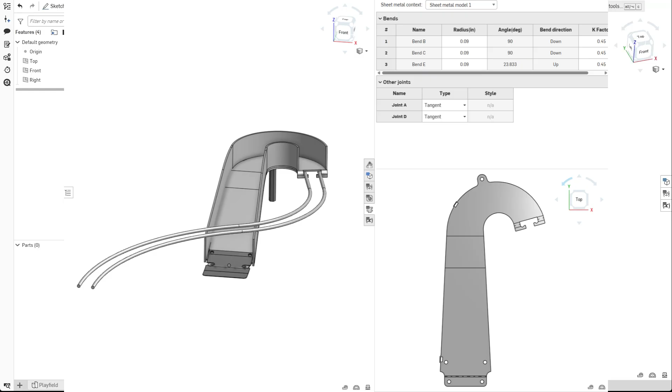There's probably a few ways to do this, but the biggest challenge when using a sheet metal model, which is this tool here, is that you can't use the standard extrusion operations except remove. So some of this process is going to be designed to kind of get around that limitation and to show you how to end up with something that's flexible and useful, but still remains a sheet metal model.

So the approach that I like to go about doing this is to create two sketches. One is going to be our outline. So if we were looking top down at the ramp, that's what we would see. And the other is the profile, which is if we were looking at the side. So the profile will describe our incline, our slope, and then the outline will describe our shape. So let's go ahead and start that. I'm just going to create a new sketch here on the top plane.

And if you were laying this out for an entire game, like you had modeled your entire playfield, one of the things you'd want to do is sample off the flippers and make sure that your entry angle looks good. However, I'm just going to show you modeling this, so I'm going to skip that part. But typically I would start with the entrance, and so I'll just do a midpoint line here. That's way too big. Let's give our entrance a size of 2.1 inches.

Okay, now from that, we can then draw some lines that come off of it, and I'm going to give it a slight taper here. Yep, okay, looking good. All right, so this is pretty standard fare so far, and for this ramp, a very common arrangement is that the ramp curves around, kind of does a 180 either to the left or the right. So let's go ahead and model going around the 180.

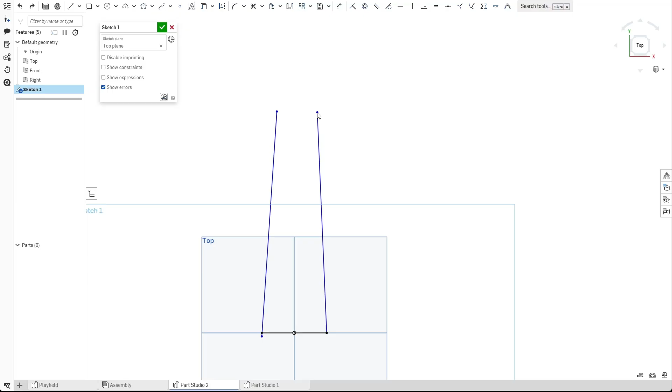Now there's a few ways to do this, and early on when I was using Onshape, I used this spline tool a lot. With spline, you kind of click out these points. The challenge with spline is that it's sometimes hard to control, but even more so, the big thing to know is that Onshape does not recognize it as a cylindrical surface. And why that is important is later on, if you want to add bendable tabs to your model, you will probably end up using a tool called wrap, and wrap requires that you have a cylindrical face.

So the solution is pretty much to stop using spline and instead use this one here called 3-point arc. The way that 3-point arc works, I'll do a demo off here to the side and then we'll do the real thing, is you have to place 3 points. The first point is the start of your arc. The second point is the end of your arc, and I'm clicking each time I do this. And then the third point is defining the radius or flex of the arc. Now, as I get close over here, it wants to snap. You see how that wants to snap there? So we can use that to our advantage.

So I'm going to select 3-point arc, and I'm going to make this ramp curve to the right. So I'm going to start on the right wall. That means I'm gonna connect with this, bring it over here, and just eyeball, let's say we go about there. Now that snapping behavior, when you connect to an existing line, will give you a coincident constraint. So there you can see it's telling me there's gonna be a perfect transition from my sidewall into this turnaround. So I'll go ahead and accept that.

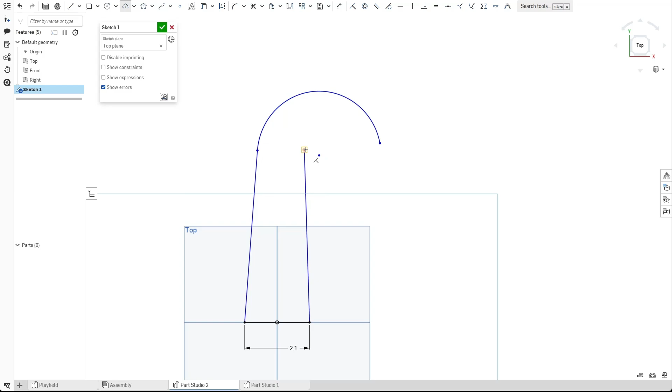And then let me do one more, same thing. I'm just going to click over here, look for the constraint, and then we're good. Okay, so I want to add a few more constraints. Let's go ahead and finish this. Let's give that a fixed size. So that was a good guess.

I was going to make it 1.4, and I got pretty close. So that's nice. And then over here, let's just constrain that to 1.5 to make sure that this is very comfortable for the ball to pass through.

At this point, depending on what we were trying to achieve, this might actually be sufficient. In your use case, you may want to dimension some of the angles here. For example, maybe you want that exactly at 87 so that it's a little straighter.

The other thing to be concerned about is this exit there. So depending on how you have this set up, maybe you want to dimension the angle coming off of that. For example, maybe I want to set that to 165. That's a little wonky. So maybe this is a bit more the shape that I care about.

And then of course, lastly, maybe you care about this approach length, so maybe I want to make that a little bit more. Wow, that just weirded out, didn't it?

Okay, we're going to have to fix that. I'm going to undo some of that. That probably would have been smarter to do ahead of time, but I'm not going to redo all of this. Okay, so we've got our basic shape here, kind of set out.

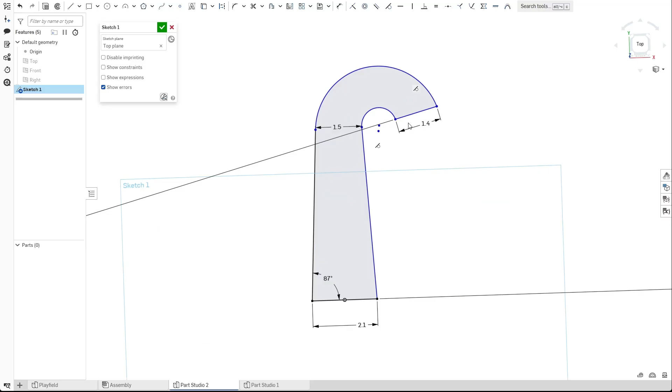Remember, we're only trying to describe what the ramp looks like from the top. So I'm going to accept that, and just to keep things tidy and organized, I'll go ahead and name that.

Now, the next thing that I want to do is create a sketch that's going to describe the slope, or the rise or incline, of our ramp. The easiest way that I've found is to come back here to this outline and make a construction line.

In this case, I used the center line of the ramp entrance, and I drew a perpendicular line off of it, and made it a construction line. The reason why is that now I can use that: if I go to plane and line angle, I can select that, and you can see it's flat, but I'll put in 90 degrees there. So now I have a plane that basically bisects the entrance to my ramp, and I can use that plane to sketch our profile on.

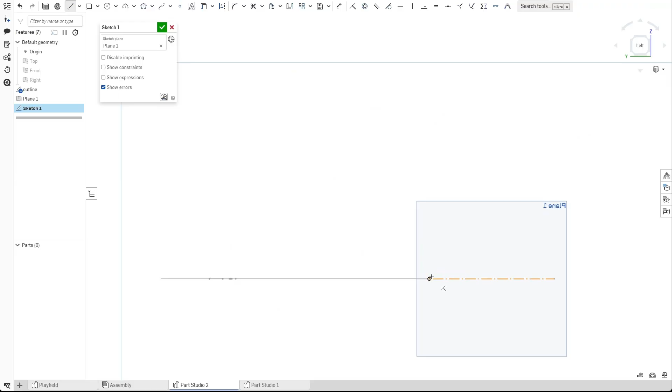I'm going to start by just eyeballing this a little bit, so maybe I'll do something like that. I started by snapping, locking the start of the slope to the beginning of our ramp, which is right there. However, I want to make sure I draw the entire side profile.

So what I'm going to do is use effectively the line that projects to how far our ramp comes out. And then from there, I'm going to draw a perpendicular line up, and this is just going to make sure our profile here matches. Okay, so that's looking good.

We can also use the height of this line to set the height of our ramp. So maybe we want our ramp to come up 1.75, or maybe 2 inches, or whatever. Great, we can set that there.

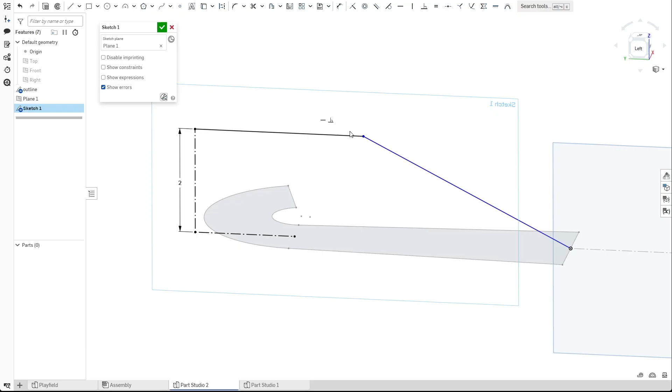Another thing we can do: typically we wouldn't want our ramp to just go straight into a sharp point here like this. We would want a smoother transition. This, of course, is a bend we would have to do when making our ramp, but we can add that in using the sketch fillet tool. So, actually a 3-inch fillet there looks pretty good.

Okay, so now we've got a smoother transition. And then the last thing to be mindful of here is that when we bend this during the manufacturing process, we're going to have to hand bend it, and we can probably only bend the part that doesn't have this return kind of sticking out. So we want to know where our return finishes.

So there you can see I projected that dot out to here. The reason why is that now we can make sure we're giving ourselves enough working room, so I'll say half an inch. What this does is, when we actually go to bend this for real, it means we're leaving ourselves a half inch so we're not accidentally bending this part back here.

Okay, cool. So just to recap here, we've done two things.

We drew an outline, so that's what our ramp is going to look like from the top down, and we drew the profile, which is what it's going to look like from the side. And I'm going to name that profile. Okay, great. Now we're actually ready to turn this into 3 dimensions.

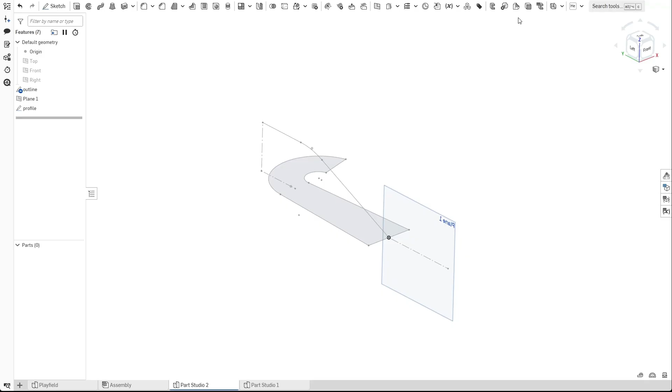So I'm going to go over here to sheet metal, because of course we're going to make this out of sheet metal. I'm going to choose extrude, and then I'm going to pick our profile. So instantly you see we start to get something here, and obviously that's not wide enough. I'm going to change this to symmetric so that it centers on our line and moves in both directions.

Then I'm going to make it large, because what we're going to do is use our outline to define the portion of the sheet metal that we want to keep. The reason we're doing this is because of that limitation I mentioned, where you can only perform a remove. Technically there's a tool called a tab that would have allowed us to add this part over here, but I find it's easier to just model the entire thing as one outline and then perform a remove on it.

So we want to stretch out our sheet metal so that it's effectively big enough to fit that. I'm just going to type in 10 inches. That's good. Okay, so this is looking good.

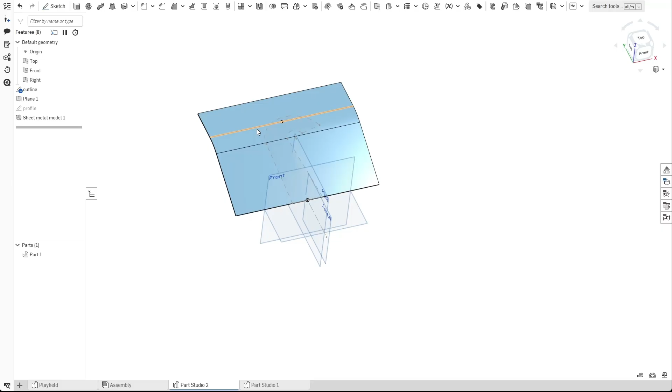The last thing we want to do is remove the portion of our sheet metal that we don't want to keep. Now, this is why there are two sketches: with sketch number 1 we defined how this sheet is going to rise, the slope of it. And we're going to use the second sketch.

So I'm going to create a new sketch on top of our sheet metal. I'm going to use the Use tool, select our 3 regions of the sheet metal, and then pick our part below. Now what this does is give me all of the negative regions. So I can choose all of those and perform a remove through all.

And let me turn off the original outline. What we're left with is a sheet metal model that has our profile and has our shape.

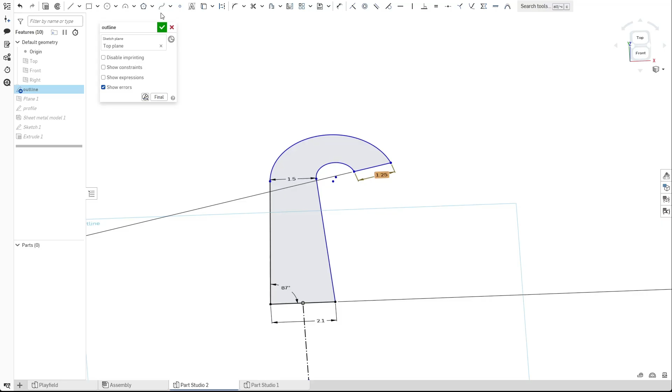And the cool thing is, if we want to make adjustments, we can go back. So let's say I change my mind and want to make that a little bit more narrow. I want to make it 1.3 inches, or maybe even 1 and 1/4 inches. I can do that, and now the whole thing updates. I've got one place I can edit the shape, and one place I can edit the slope, or the rise, the profile.

Okay, cool. So that's, of course, the first part. I'm going to name this floor.

Okay, so before we move on, there's one last thing I want to mention. If I turn these planes back on and look at the profile, we can see the sheet metal is actually going below the plane we started on. The reason for that is when we create a new sheet metal model, there are a few details over here that matter, which I'll touch on now. One of those details, of course, is the thickness.

Because I use SendCutSend a lot, my thickness is set to what I typically use, which is 0.06. But say you were going to use a different thickness, you could type that in here, and you can see it adjusts. Let me change that back. Whoops, that was too much.

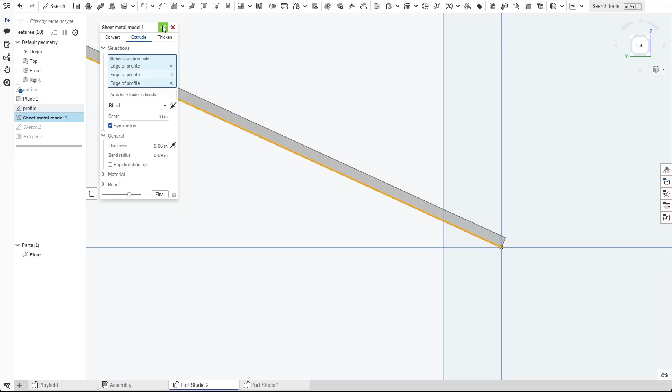The other thing is, next to this thickness there's an arrow, and what this arrow does, you can see the difference there: it toggles which side of the line the sheet metal is going to be rendered on. In this case we want our sheet metal to sit on top of our playfield, usually that's how it goes, so I want it to render on that side of the line. If you were using CNC to cut out your playfield and wanted the sheet metal to sit slightly below, you could do that and potentially avoid the need for a flap here. So I just wanted to point that out, the option's up to you. I'm going to leave it the traditional way, which typically requires a flap.

Anyways, okay, so there's part 1, which is drawing the floor.

All right, so let's work on the walls. This is where drawing an outline helps, and you will see why. Because you would think that you could just say extrude, and then choose this line here, and the wall would follow it like a sweep.

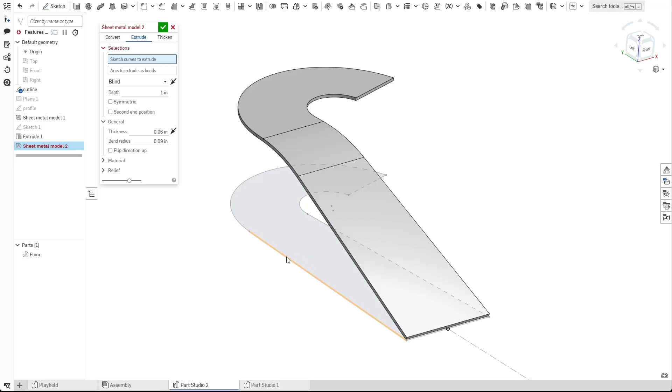That would be so much more convenient, but unfortunately OnShape doesn't seem to support that. So the way I've found around this is, I brought back our outline, and I can create a wall there. Of course, this is another case where the alignment of the wall matters. So you either put your wall on top of your floor and cut out the portion you don't want, or you put your wall outside your floor and add tabs on the bottom where it connects. Either way is fine, the choice is up to you.

I'm going to put my wall - you know what, I'll put it on the outside. Okay, so I've got my wall there, and as you can see, it's not high enough, so we need to know something here. Before we continue, we need to know how high our ramp comes up.

So we go back here to our profile, you can see I've got this value - this is the height of our ramp. What I'm going to do is create a variable for that. We'll call this ramp height, and I'll say 2 inches. Here's a key: variables have to be defined before you can use them, so I typically always drag them up to the top.

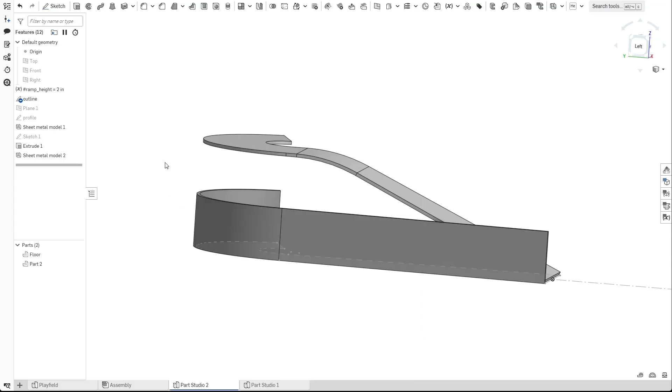I'm going to go back to profile here, and edit this so that we're using that variable. And now here, when we are defining this, I can use that variable as well. So using ramp height, you can see it will bring us up to right on the bottom of where our ramp is. And we've got our metal thickness, so I'll say 0.06 inches. Now you can see it's coming up so that it's the same height.

And then on top of this, whatever we want to add for our wall up here, we can. So I'll just go with 1 inch. Okay, that's great. Let me do that again for the other side - boom, boom, boom, and I'll do the same thing: ramp height plus metal thickness plus the wall height gives us our wall.

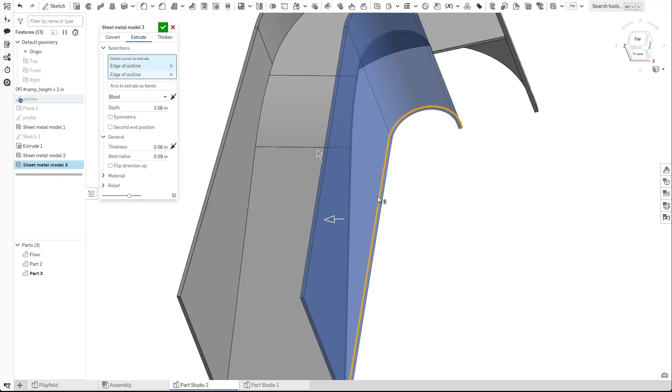And what did I do there? I selected something I should not have - I do not want that line to be a part of it. All right, there we go, that looks good, looking great. I'm going to adjust the appearance of those real quick.

So now, obviously that's not how the wall should go. What we want to do is cut out the region here that will be the portion of the wall that we want to keep. Because remember, the limitation is we can only remove, we cannot add. So I'm going to create a new sketch.

I'm going to project both of those there, turn off that area, and project all of this geometry here. I'll turn it back on. Oh, I messed up - let me try that again, I missed this part here. I projected that center dot instead of projecting the line. Anyways, so it gives us that region there.

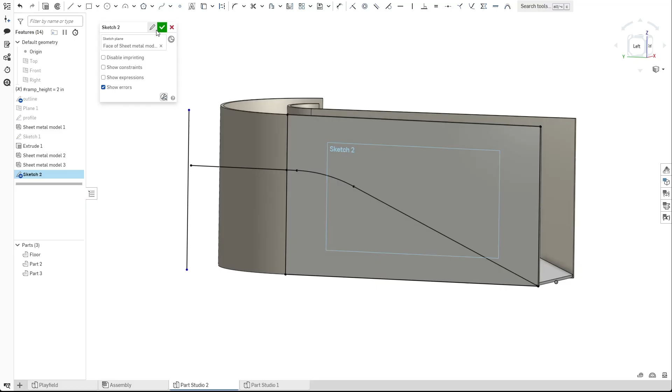This isn't going to be our final, but let me just show you what we're going to do with this. So now that we have this, I'm going to fill it in - I'll connect that line there, connect to this bottom line here, and connect the top line here. So now we've got these regions all the way filled in.

You can see here if I perform a remove operation - whoa, okay, so you see how it deleted that entire area? The part on the left looks good, the part on the right doesn't look good. What happens if this happens to you? It means that line is not completed.

So let's take a look here - we're looking for the section that is not completed. I bet it's down here. Yeah, so see how we had this little gap here? I am going to finish that off by connecting it.

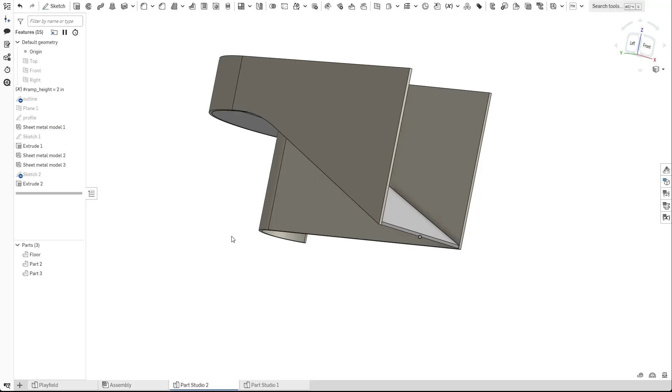And now we will perform a remove, I'll say through all. And so there you can see, at least on this side, our wall is now following very nice and neatly along our ramp.

But of course the top portion still needs to be done. Did I choose the wrong color for these? Why does that? Yeah, I did choose the wrong color. So let's finish off this top portion. So I'm going to go back to the sketch, and I'm going to call this sketch, by the way, wall outline. Okay, so there we go. Wall outline. And now I'm going to use the, where is it?

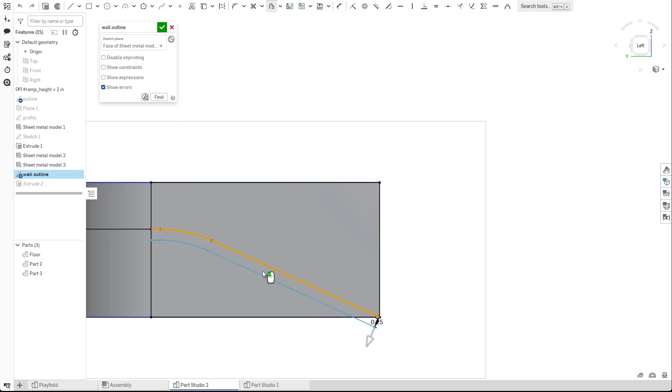The offset tool. And so I'm going to start down here by picking that, and that, and that, and that. And of course the offset's going the wrong way, so we're going to flip it around. I'm going to say 1 inch offset. And actually I want it to be 1.06 because in this case it's the height of our wall, which is 1 inch, plus the thickness of our metal.

Great. And so now if I go back to this extrude, I can choose that top portion and I can remove that as well. And so there you see that we've got a nice smooth wall that follows the contour. And let me turn off the other side. And here's the thing, is this is still a sheet metal model. So for both of these, we could always go over here and we could get the flattened form. So of course that's our floor. And there's our flattened wall. I'm gonna do the right side real quick, and then I will jump back in for some other things this ramp might need.

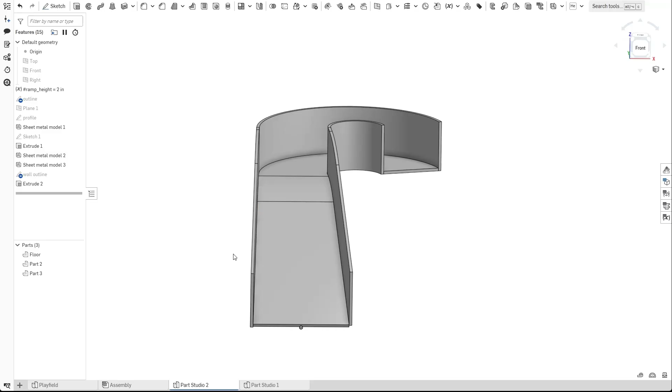Okay, so here we are. We've got a pretty good looking ramp, right? Like, this looks like it would be pretty usable on a lot of machines, but the concerns that we still have are how are we going to attach the walls, right? Because right now these are just loose parts, and if we bent them, they would have no way of attaching together. So how are we going to attach these walls together?

That's a question. Another question is there's probably going to be a wireform that this goes into, and so how is the wireform going to attach? That's a second question. And then a third question, of course, is how are we going to actually attach this to the top of the playfield? So let's just start with that first question, which is how are we going to attach this together?

Now, I mentioned at the start here that there was a decision to make as to how you wanted to do this. And the way that I've ended up doing it is you can see that the floor fits on the inside of the wall. Now, that's useful if you want the tab to stick out the side. That's usually the uglier option, in my opinion. I mean, if you want to do that, sometimes certain use cases will require that. And if that's what you want to do, that's fine.

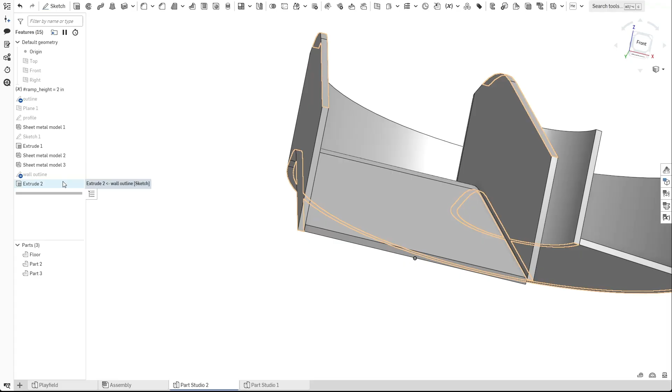However, I'm going to change this up, and I'm going to instead have the tabs go down through the floor. Now, what that means is that the wall has to sit on top of the floor in order for that to work. I'm going to change the direction that the sheet metal model renders. You can see now it's rendering to the left. I'm going to flip it so that it renders to the right, and that will then go through the floor. Okay, so I did that for the left side, and then let me go ahead and do that for the right side.

With that change in place, you can see that there's now a bit of overlap, and what happens is the wall actually comes down on top of the floor here. So there are a couple of things that we could do now. The way that I have gone about this, and from what I've observed of ramps made by commercial companies, I've seen them doing this as well, is that we can have tabs that stick through the floor, and then we just bend them during assembly.

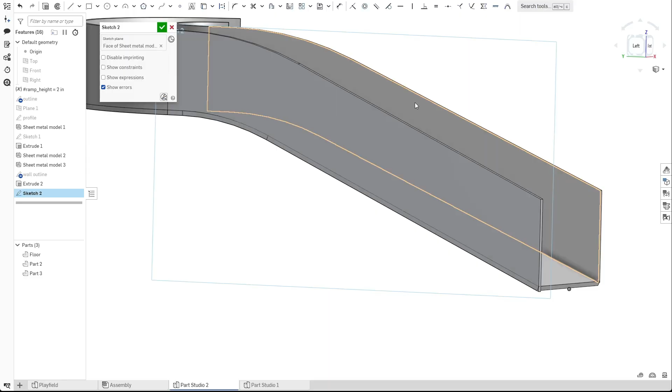So let's go ahead and add that to this wall here. Now, for the sake of demonstration, I'm not going to do all of these. I'm just going to do a few. So let me start first by using this geometry here. Okay. So there we go. So we know that we're not going to need this portion, and then we know we're going to probably want to drop down below that.

Let me turn off this stuff in the back so it's easier to see. So for example here, this area, the part that I have outlined, that's where our floor is going to be. And then we probably want a tab to come out. So I'm going to freehand this and then add some dimensions here in a second.

And you know, something that I should have done, something that you should do, is I'm going to make a variable for metal thickness instead of typing it everywhere. I probably should have done this a while ago. Anyways, drag that up there.

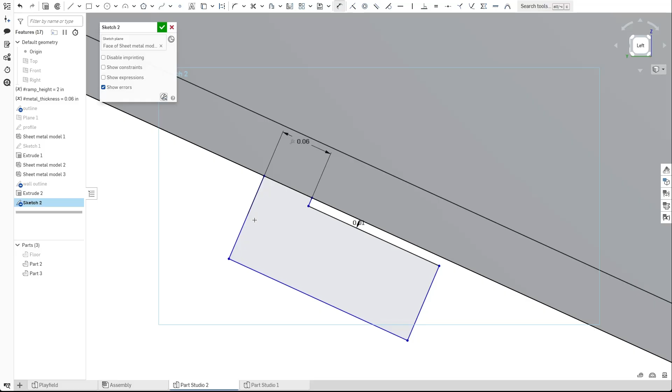So now I'm going to say that my tab, the thickness is metal thickness, and I want it to come down 0.01, and we'll have it be the thickness of the metal thickness, and then we'll have the length of this tab be, actually, no, we'll have it be metal thickness times 2. Okay. And then I will bring that up there. And I will bring, what did I do there? And then I will bring this up here.

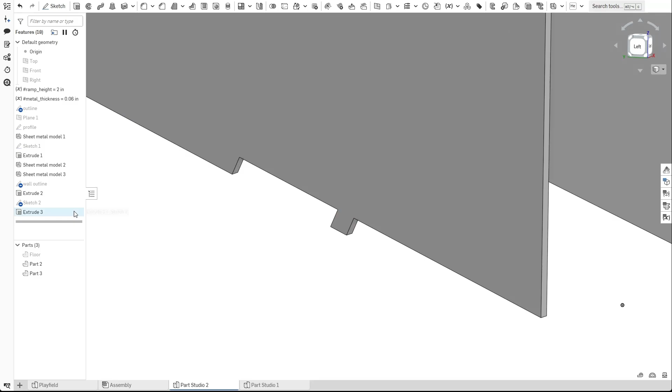Okay, so now that we've got this sketch, we want to perform two things here. One is we want to perform a remove. And so that will get rid of the excess material around it so that our tab will stick through. The other thing we want to do is, now you can see we've removed the region, but our tab has disappeared. I'm going to bring this sketch back.

There's another sheet metal operation here called tab. Yep, that does exactly what you think. So I'm going to choose that geometry there. And now we have a tab. So of course, this is something that you would want to do all the way up the side. You know, maybe on this one you would want 3, maybe 4.

If I bring the floor back though, you can see what this is doing. So this is going to punch through the floor, and what will happen is this can get laser cut out, and then when you actually assemble this, you'll stick this tab through the slot, which we'll make in a second, and then you bend it, and that will hold the ramp in place.

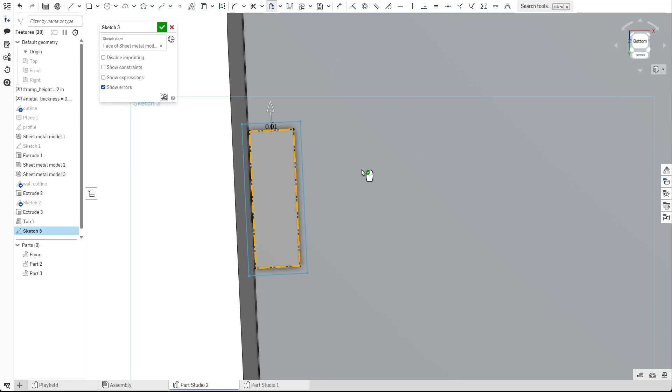So let's actually work on the slot here. So I'm going to create a sketch on the bottom. So obviously here, we're going to want to make it around this. What I'm going to do is I'm going to use that. I'm going to change it to construction geometry, and then I'll do an outline all around it. And in this case, we can just have a small outline. Okay, perfect. We will remove the area in the middle there.

And then the other thing that we probably want to do is create another outline outside of that. And what I'll do here is I'll say half of metal thickness. All right, perfect. And then I will sample that line there. Let me trim what we've got. So here's what we're going to do. We want to start by removing, so we want to clear area for our tab to go through. So I'm going to do an extrude and remove. Great. So now you can see that our tab will fit through.

But the problem is, whoops, sorry. The problem is that we want to cover this other side so that it encloses it. So if I turn this back on, we're going to do that same thing where we go to add tab. I'm going to choose that there. There we go. Hide my sketch.

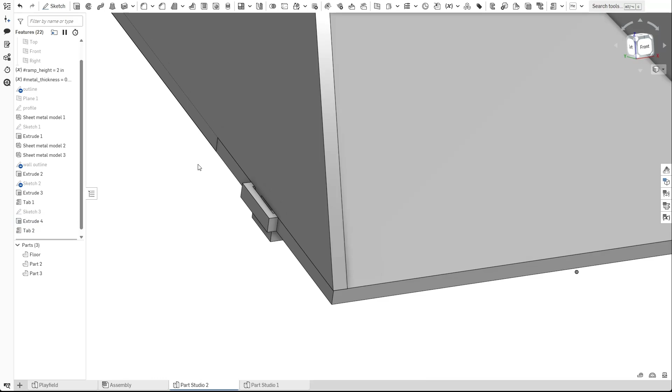And so now if I was to go and manufacture this, let me turn off the left side here, this is what the floor would look like. And then this is what my wall would look like. And then when I get them, I would just slip that in there and give that portion there a little twist, and it would hold together.

Now, obviously, this could probably look nicer, right? What would probably make sense here is if we added some fillets to this. So just to do a quick example here, I'll just add that there. And then maybe what we do is, you know what? I'm not going to do that. I'm going to use the fillet tool, because that would be a whole lot smarter, wouldn't it? Yep, that and that. And so now we've got a nice little fillet. That looks a lot better, right?

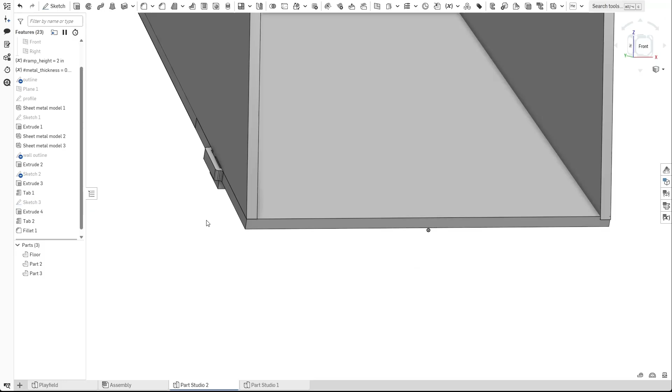And just in case you're thinking that's going to look ugly, remember, the actual scale of this, when it gets put on the game, is going to look like that. And there's going to be posts and plastics and stuff in front of it. And if you look on production ramps, they're doing this exact same kind of thing, and it looks just fine. Okay, so I only did one, and I did it down here. But obviously, you would want to do it up the side, and you'd want to do it on the other side.

Now, here's the tricky part: how would you make this tab on this rounded section back here? Because this is definitely a lot more difficult. You cannot, for example, just say sketch and click on this rounded face. Now, I mentioned at the start of this video that one of the advantages when we made our outline of using a 3-point arc instead of the spline tool is that the spline tool is not recognized as a cylindrical face, but the 3-point arc is.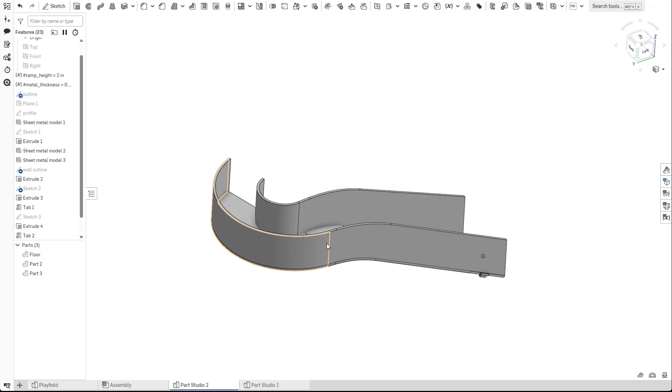Now, here's why that is important: we could draw a sketch, and because Onshape recognizes this as a cylindrical face, we could then wrap that sketch around it. So let me show you how exactly I would go about doing that. So I'm going to create a sketch here. And one of the things that we need to know is basically what is the circumference of this arc on this back part here.

So I'm going to go over here to our sheet metal model. And you can see that as I mouse over it, I can see the regions. And so this region over here in the flattened is the same as this arc region. And all I need to do now is just to click on that, and I can see down here the length of it. If you had a more complicated ramp that had multiple, you could just select the start and the end point of the arc. So there you can see that's what I've done, start and the end point, and it's going to be the same value. I'm going to copy that value.

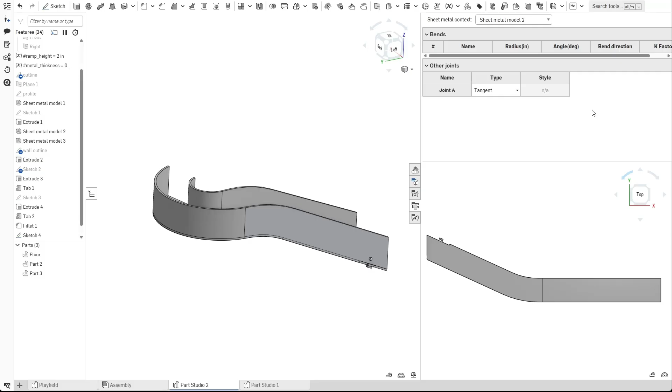So copy that. Now let's go back to our sketch here. And so I'm going to create that. And then I'm going to dimension the length, and I'm going to paste that value that I copied. Now, what we're looking at here in our sketch is we've got a rectangular section, and that's going to get wrapped onto this cylindrical face. So, you know what? Why did I go back there?

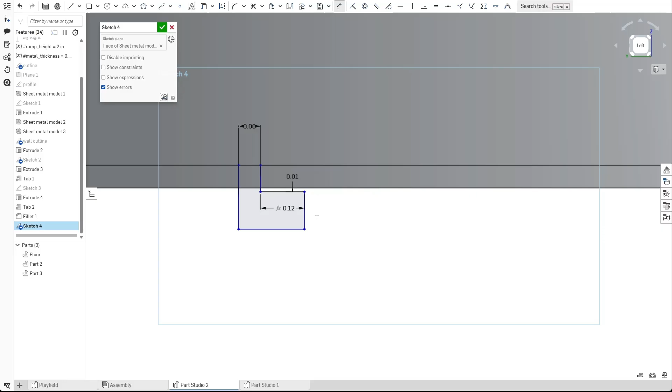Let's add some stuff in now. So I'm gonna use that and complete this line all the way through. So we know that that's the portion that's going to get cut. And then let me go ahead and just add a tab over here. So this should look familiar. This is what I did on the other portion. So we'll do metal thickness. I'll do 0.01. This will be metal thickness times 2. Great. And metal thickness. All right. Perfect.

Now, what we can do is we can do that same business where we're going to cut it. The trick, though, is that before we do that, we're going to want to wrap it. So I'm going to come up here to transform. It's the chevron next to transform, and I'm going to choose wrap. Now, this part is a little tricky because you can see there's solid, surface, and split. I'm going to leave it on surface for now just so you can see what this does.

So tools are effectively the part of the sketch that I want to wrap. So let's say that I want to use all of that down there. And then the target is what I want to wrap it onto. So I can choose that. And now if you look here, I'm going to hide the sketch. If you look, you can see that it has mapped that tab onto the rounded face here, which is super awesome. However, we've only got a surface.

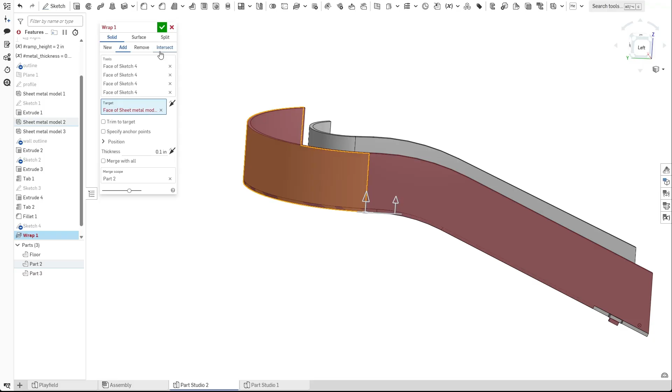If I change to a solid, you can see that it turns bright red. And the reason why is we're back to that same limitation of sheet metal where we cannot use new, add, or intersect. We can only use remove. And so, let me turn off the floor here. I could say that I want to perform a remove, and what it did there is it did perform a remove. However, I think it selected a portion that I did not want it to.

So let me reselect these tools, and I'm going to leave the middle portion. There we go. So I'm going to leave the middle portion and select the parts that I want to keep. And you can see that. Ta-da! Now you may say, oh, but where's the rest of the tab? And that's a very fair question. And honestly, this is one of those challenges of modeling with sheet metal, is that sometimes you'll find yourself in situations like this, and you will need to go back and add material so that you can perform a remove. So I'm going to go back to wall outline here.

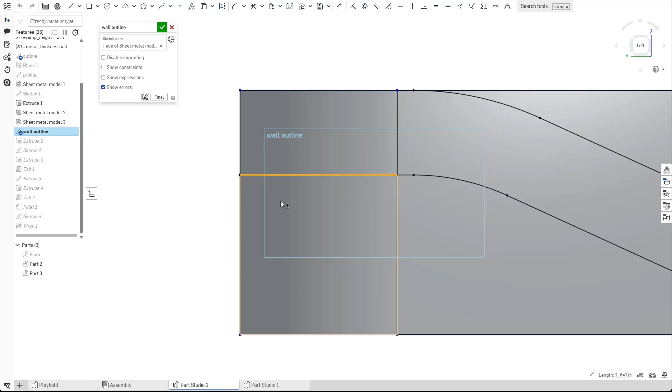And when we perform this wall outline, you can see that we're cutting to this line here. And that's going to cut off too much material. So we want to keep some of that material. I'm going to add this line here. And the distance, if you recall, was metal thickness plus 0.01 inch. So we're going to keep that amount of material. Now you can see I've kept that material.

I'm going to go back here. And you can see it's already complaining that we changed our geometry. Yes, yes, we changed our geometry. So I'm going to reselect that and bring that over there. Bring that down. So now you can see we've got our geometry here. All right. And I'm going to go back to wrap.

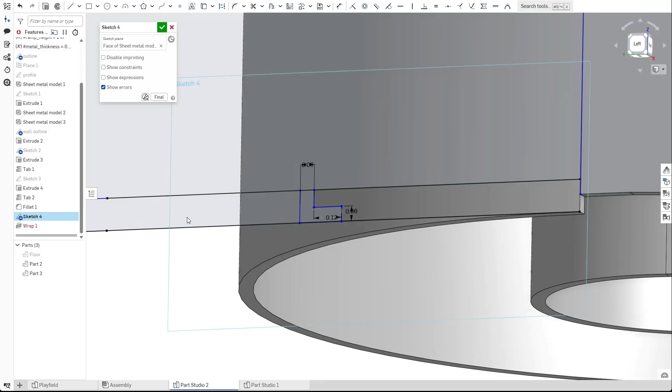And the tools that I want to use are this portion here and this portion here. And you see how I cannot select this, like that's not grayed out. So that means that once again, our sketch is not fully closed. I see it. I'm missing that leg right there. So wrap, I'm going to choose that. I'm going to choose that. And I'm going to turn off the sketch.

Now, of course, I only did one tab, but you can see here that it has in fact wrapped on that cylindrical face. So I know that that was probably a little bit roundabout, but that's just one of the things about using sheet metal. We could go and we could perform that same thing.

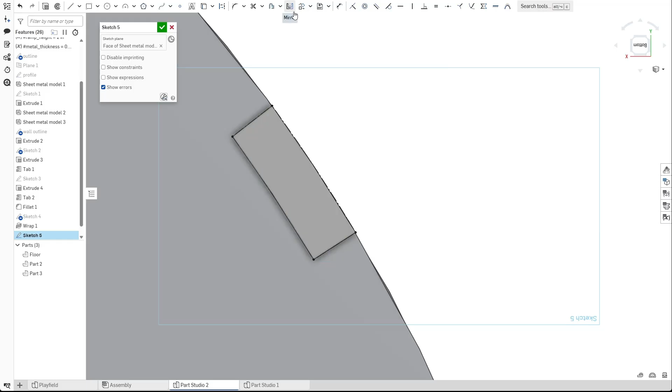So over here, we want to cut a hole and then have a little bit of an outline. So I'm going to project all of that, change that to construction geometry. Let's do an offset on that. We're going to offset it 0.01. Great. And then I'm going to do one more offset on this. Maybe we'll make that 0.02. I'm going to use that line there. Trim up this outer portion.

Perfect. Perform a remove on that so that our tab can fit through. Turn the sketch back on. Perform a tab. And then add fillets. Fillet, fillet, fillet, fillet. And now on a curved face, we have a tab that will slot into our floor.

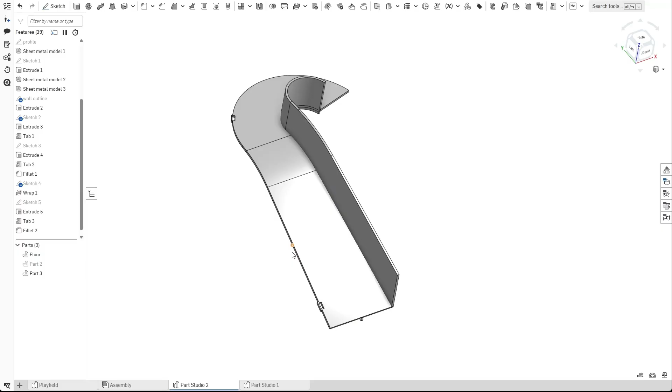So if I turn off that left wall, you can see that our floor is developing. Once again, you probably would want to have maybe another 2 down here, and then maybe another 2 up here. And then, of course, you'd want to do it on the right wall. But hopefully, both of those examples give you an idea about how to do that.

All right, so we've only got a few issues left. One is how the Wireform is going to mount over here to our ramp. And the second issue is how we're going to mount our ramp to the top of the playfield. So let's tackle those. Let's start first with this over here. So there's a couple of ways that you could go about this. I'm going to show you the way that will probably be frustrating, and then I'll show you how to make it easier.

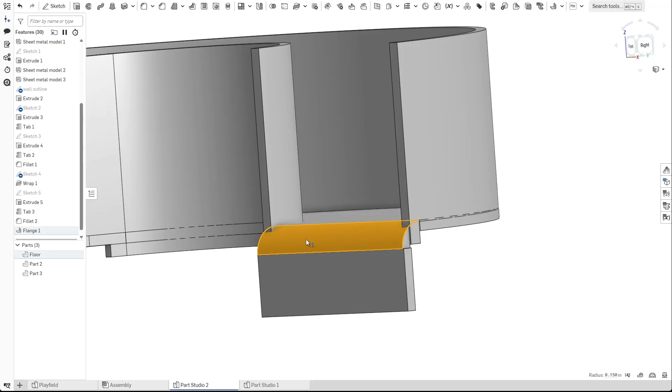So the way that will probably be frustrating is that if you choose flange and you choose this edge, and you just say, I want to flange that down, and then I want to cut off a portion and make it so that the Wireform fits in here. The disadvantage of this is that Onshape does not want you to make cuts in this bend right here. But the problem, of course, is then your Wireform, like that would be a drop. The ball would have to drop off into the Wireform, and that's not a nice transition. So we're going to get rid of that.

And instead, what we're going to do is we're going to start by modeling on the top of our floor here. So I'm going to create a new sketch, press N to normalize to that sketch, and I'm going to start by drawing the center line here just to do some reference.

Okay, so one way to avoid the problem of not cutting through a bend is to add a little bit of a tab and then perform the bend off of the tab. And the key is that the tab will be shorter than the entire width, and so you only bend that region. That probably sounded weird, so let me just show you what I'm talking about. I'm going to create a rectangle off of the end of our ramp here. And these dimensions don't matter because we'll trim it in a second.

I'm trying to find, there's the perpendicular constraint. And I want to make that perpendicular, and now I'm going to use the trim tool to cut that off. Okay, perfect. Now the distance here is important. It needs to be at least 0.09. And the reason that I know that distance is if we go back to the sheet metal model, you can see over here it says bend radius is 0.09. So that means that we have to have at least that much material in order to perform a bend.

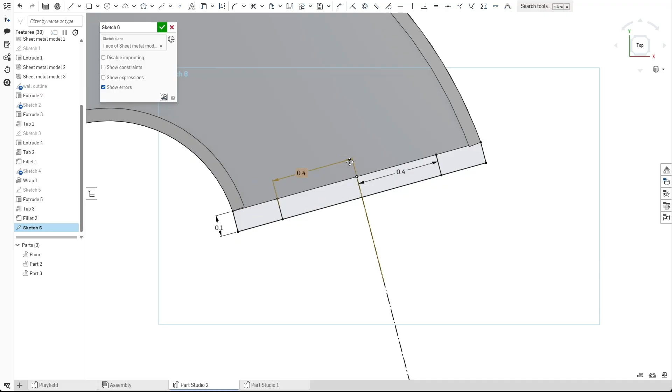And the question now is, how wide is our ball path? So when we have 2 wires that come out from it, how wide is that going to be? That's a value actually that we kind of need to know right here. So I'm going to say that our ball path is going to be just slightly over ½ an inch. Whoops. And so I want to leave enough space for that. Okay, so whoops, I dimensioned that the wrong way. Let me try that again. Let me see if I can type. Okay, there we go. 3rd time's a charm.

So now we've got these pieces on the end, and what I'm going to do is I'm going to add those as a tab to our face. And now, this is the part I was talking about. Now that I just have these little bits that jut out, I can perform a flange on those. And this is the key, because now we've left this whole middle region here in order for us to slot the wireform into. So I don't know how far we're going to need this to come down. I just typed in 1/2 inch, but let's work on this next part here.

So I created a sketch off of this tab, and let's sample the midpoint of our exit, and let's draw our wires. So here's where our wires are going to go. So I'm going with 1/8 inch, and we will tangent our wire to the bottom of our ramp. In other words, we expect it to slot into there.

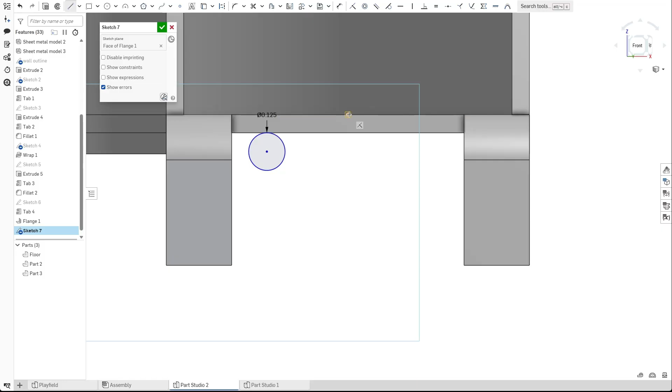And I'm going to add a center line, and we want to say that the width of our ramp between center to center wires, sorry, the width of our ball path, why do I keep typing in the wrong thing? The width of our, wow, okay, it's late at night. The width of our entire wireform is that it's going to be 0.6 of an inch from wire center to wire center. So that means it'll be half of that distance. So I'm going to use mirror and copy that over. So this is where our wires are going to go. And I'm just adding these on here as reference points.

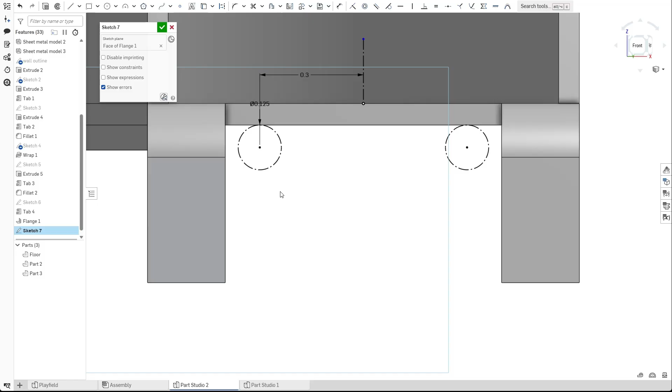And so now what we want to do is we want to bring a tab over and under in order to support this. So I'm going to say it probably comes out a little bit here. Let's say it comes out 1/4 of an inch. And then let's say it comes down. That's probably too much. We'll say 125. That's 1/8 of an inch. Okay. All right, so that probably looks good.

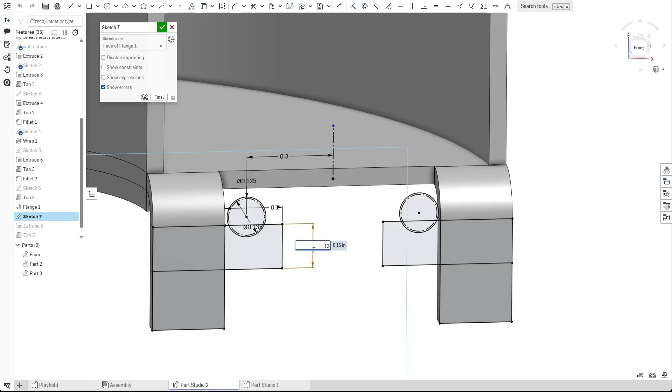Okay, so you can see that one side added well, and the other side, we've got this weird thing going on here. Oh, and you know what I just noticed? I just noticed that I forgot to copy over that piece right there. Okay, and that's all it was. That was silly. Let's go back to what we had. 125. All right, great.

So now, if I turn off this sketch, you can see that what we're left with is we have a region now that our wireform, if it's 0.6 center to center wire, will just slot in here, and the bottom of our ramp will be used as support. And then elsewhere, we can add wire supports. So just to show you what that looks like real quick, I will sketch that out so that you can see what I'm talking about.

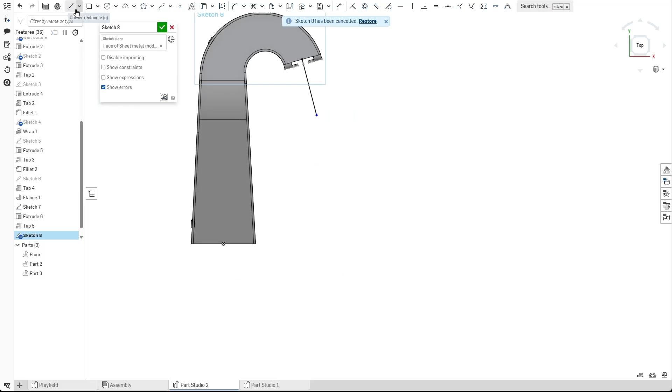If I bring that sketch back, what I'm going to do is I'm going to undo the construction geometry on that. Okay, great. And then let's make a new path for our wireform to follow. So what I'm doing right now is I'm drawing the path that our wireform would take. And so we'll say 3-point arc.

And yes, okay, perfect. So maybe something like that. I'm just kind of making this up, by the way.

So, because I just want to describe what I mean by this, I'm going to use sweep, and I'm going to select those portions, and then I'm going to select this line. Great, so now we've got our wireform.

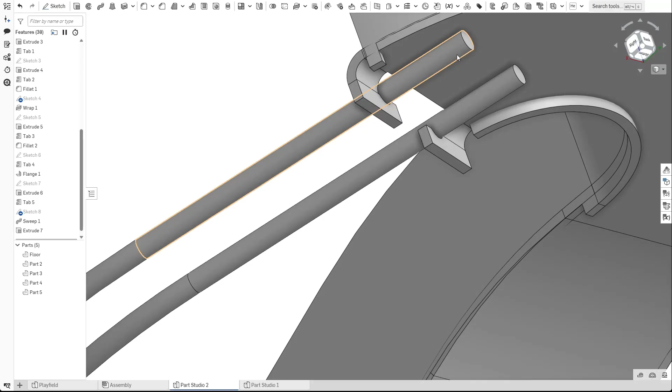And here's the thing that I was trying to describe, is when this wireform gets stuck into the ramp, what we are likely going to do is this right here. So the wireform will slot through those little holder tabs, and pushing against the top of the ramp will add pressure. And elsewhere, there will be some kind of mount that actually holds this up, but this should be sufficient to hold it in place.

And one such way of doing that is we can just create a sketch here on this floor and add a triangular cut like this. What this will do is it will help the ball transition and drop down into the wireform without as much of a clunk, because as the ball rolls into the triangle, it will slowly descend.

So we've resolved now how our ramp's walls and floors are going to attach, and how our ramp is going to attach to our wireform. I'm going to turn those off because we don't need them. The last piece now is how our ramp is going to attach to our playfield.

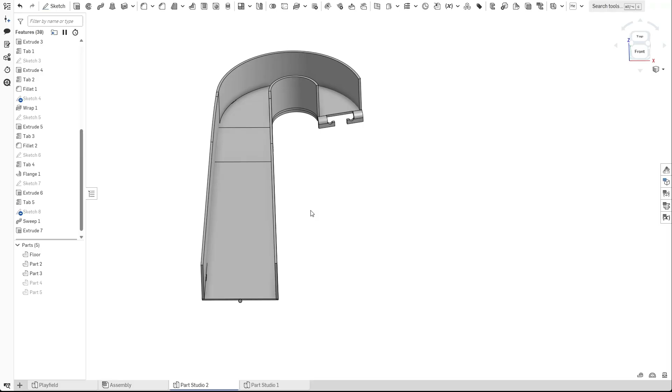So this one, hopefully by this point, should be getting a little easier. Say that we've got some kind of hex support. Well, you probably can guess. All we need to do is, I created a sketch on this upper area here.

And what we could do here is we could say, I'm going to just create another region here. You know, you would need to know where you're going to support this, but we'll say that we'll add a hole here to screw a hex support into.

So I've gone ahead and modeled the round portion, and I'm just going to create two lines on the side that connect to that geometry there, and then I'm going to use tangent and tangent. Of course, you would want to measure a lot of this out so that it matches your playfield.

But I'm just doing a demonstration, and I'm going to trim off these other pieces. Perfect, perfect. And then I'm going to say add tab.

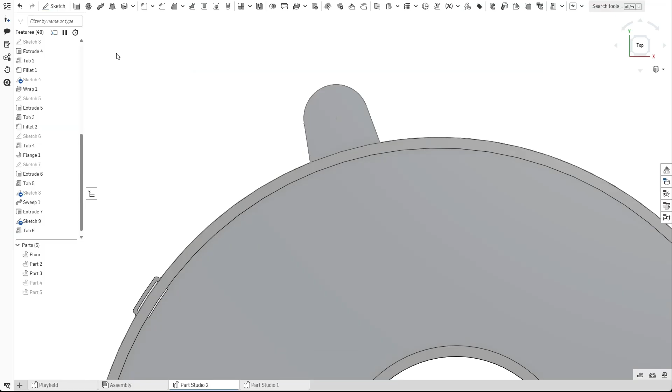Great, I'm going to turn that on, and I'm going to use the holes tool. And in this case, let's say that it's going to go through a number 6, like a 632. I can just add a number 6 hole there. And maybe to make that look a little nicer, I can add a fillet.

Yeah, something like that. So now on the back of my ramp here, if I turn off my wall, you can see that that would be a portion that we cut out.

And then of course, when it gets mounted on the playfield, you know, maybe there's a, actually I'll just go ahead and sketch it. Maybe there's like a hex spacer that comes out of this. Maybe something like this.

Yep, and we got a variable for our ramp height.

Yeah, so, you know, maybe you've got this mounted on a post or something of that sort. And then you've just got a hex spacer to keep it up on the back. That's certainly one approach. That keeps it up in the back.

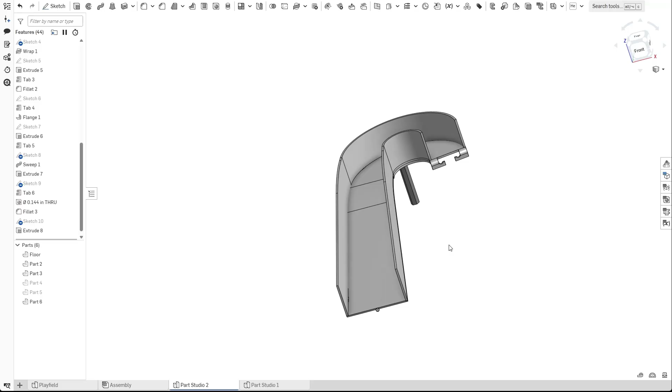With the mount in the back taken care of, let's turn our attention to the front. Now there's a few ways that this could go, but actually let me turn off the wireforms here. Whoops, what did I do there? So that one and that one.

So there's a few ways that this could go, but the way that I've seen this done on most professional ramps is that they add a flange that comes out the front. So I'm going to pick flange from up here, as I have in the past, and we'll select that bottom edge.

And you see now that it kind of looks like it's blocking the ramp, and we could just take a guess at what that is, but let me show you how to properly do this.

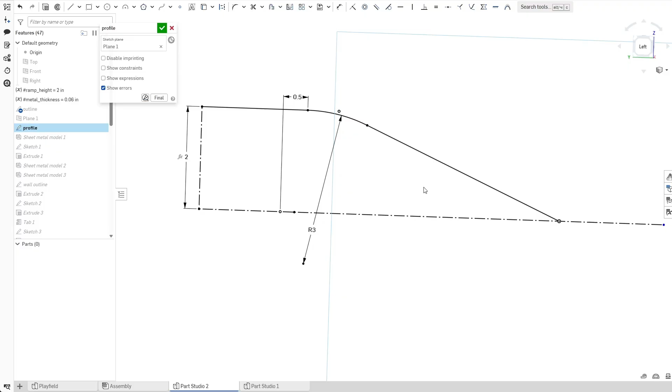So way back here at the start, when we drew our profile, that is the side view of our ramp. When we did this, there is an angle between these two. You just saw me remove it. I'm going to add it back.

So that value there. Now, the way that math works is because we want this line to be parallel with the slope of a ramp, we could just copy that angle and paste it, and it would be fine.

In fact, let me show you that. We're going to come back and change this, but I just copied that angle, and I'm going to jump over here to flange, and I'm going to paste in that angle, and you can see that it is perfectly flat.

The problem that we may face, though, is when we go to actually produce this ramp, most online services that do bending will not do a weird angle like that. So we can make a few adjustments here. I'm going to delete that angle.

So in terms of constraints, let's say that we wanted that to be an even angle, and I put this back, but I typed in 24. You see the entire thing here goes red. And that's because we can either set this angle or we can set this fixed height.

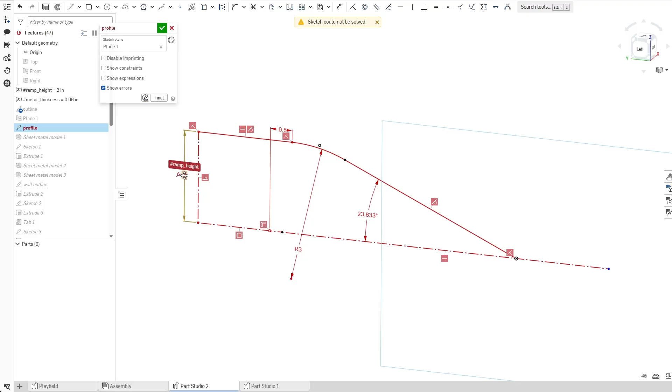We can't do both. So for example, in this case, you see if I delete the dimension on the height, now it works out perfectly fine. And here you can see that my height is slightly different.

So all I'm going to do is I'm just going to switch which value I copy. So I'm going to copy that height value there. And now we've got this nice 24 degrees. I'm going to go up here to my ramp height, and I'm going to paste in that value.

And this is an advantage of using variables. In fact, as a CAD designer, I feel like I should use variables more often than I do. But let me roll forward here, and actually let's add a variable for the ramp angle.

So we'll call this ramp incline, and that's going to be 24 degrees. Put it up here at the top on our profile. I'll stick that in. Ramp incline, perfect, 24. And now over here on our mounting flange here, we could say ramp incline.

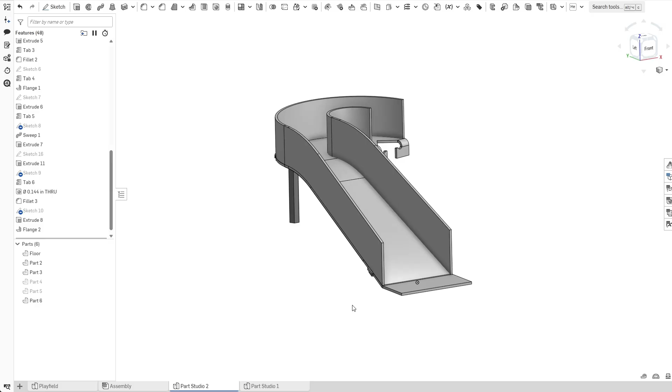All right, so now we have it at an angle that is a whole number and can actually be professionally bent if we were going to have this manufactured.

Now, another thing here is you saw at the start that I just dropped the flange right along the entire front entrance. However, more often than not, what actually happens is we might want to trim a little bit off of the ends here. So on that corner there and on that corner there.

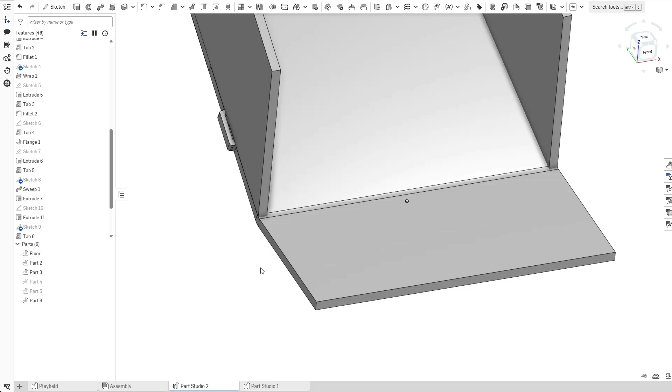And in order to do that, we can use a trick much like we did up here, where instead of just dropping the flange on the edge, we can do some editing work on this part up here to minimize the amount of flange width that we have, because Onshape does not let you do a remove on a bend.

So I'm going to step back in history. I can just roll this back, and what I'm going to do is I'm going to create a sketch on the top of the floor here, and let's just cut away some of this material. So let me turn off the walls.

So I'm just going to draw a circle here, and let's say that this will be something like that. Maybe it'll be 3/4 of an inch, and then I'll do one on the other side. And then I can remove that area. So now I've shortened that a little bit.

And now if I pull forward in history for the flange, you can see we've got a little bit of a shorter area there, and our walls come down just like they should.

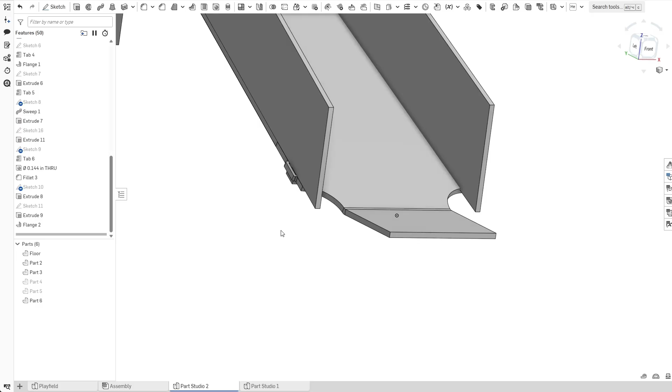Now this can be useful if you're planning on adding other features over here, maybe a post or a target, or even those nubs of death that go on the side. All of those, you're probably going to want a shorter mounting flange on the front, and that's how you do that.

Now I'm noticing here that my flange is a little long, so let's shorten that down a little bit. That's probably about right. All right, so with the flange in place now, one of the next concerns we have is how are we actually going to attach this flange to the playfield of the game?

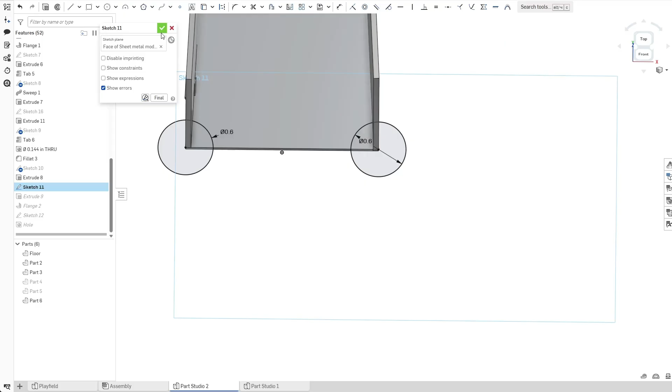All right, perfect. Now looking at that, I may have made this cutaway up here on the top slightly too big, so I'm going to go back and just make those maybe a little bit smaller. We'll do 0.6. All right, let's see how that looks. Okay, yeah, I think that looks good.

And maybe we'll add a fillet here on the corner. Perfect. So we can use the PEM studs, and those will go down through our playfield and mount on the top. And then typically from here, you would have a flap over top of this ramp that would cover up this area and make a nice transition.

So let's just draw that in. I'm going to turn off my left wall here, and let's turn the planes back on. And in this case, this was the plane, yeah, that's the plane that bisects our ramp. So let me go ahead and add a sketch on that, and turn the planes off. That hotkey is P, by the way. P will toggle planes on and off.

So let's go ahead and draw one out here. Let me see, where am I at? I'm just looking at where some of these pieces are. I want to avoid that hole a little bit, so I'll probably start about there.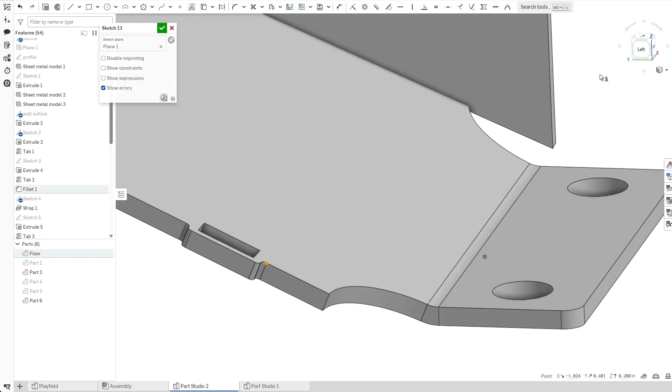And now I can draw out a little bit of a length here. I want to make this parallel to the top. And this distance - spring steel is typically 0.015 thick. In this case, I want it to come just up to where our first slot is, so that's why I am projecting that dot. I will make that coincident.

And then I want something to come out here, down here on the bottom. I'm just going to kind of eyeball something there, and that will be 0.015. Okay, perfect. And it probably will have a lot more of a bend in it like that. And then let's add an arc in here.

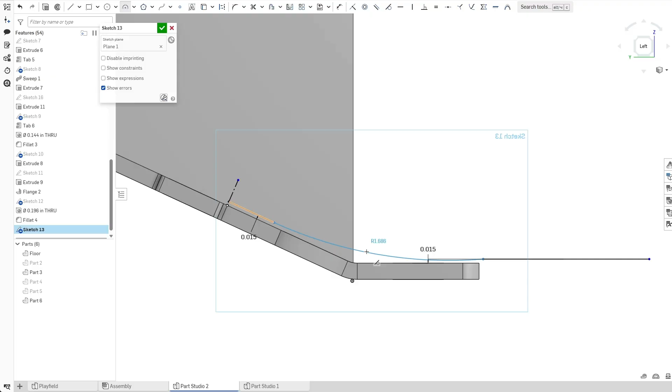All right, so that's probably about the area that our flap would occupy. Did I say slot? I meant flap. That's the area our flap will occupy.

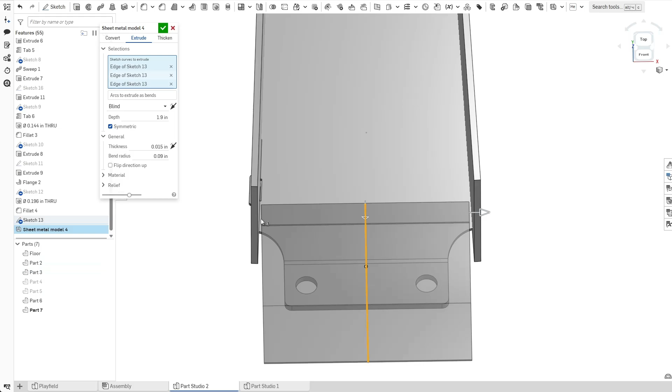And then let me just select that here. Our thickness there is set, but I want that to be symmetrical. And probably that looks too much. Whoops - decimal points are important, kids. Yeah, so that's probably, I'm just kind of eyeballing this. What I'm looking for here is making sure that we're not running into the wall on either side. All right, so that looks reasonable.

There's two more things we still need to do. One is we need to add holes where the rivets will go through to attach to the floor of our ramp. And then secondly, we may want to give ourselves a little bit of access to actually put the PEM bolts in.

So let's take care of that. And you know what, looking at this, I don't think I gave myself enough room right there, so let's go back and fix that real quick. So where is my - there it is. Here's my sketch here. Just going to bring that down and give myself a little bit more room here. That's probably good.

Okay, so let's create a sketch plane that we're going to use to draw on what's happening here.

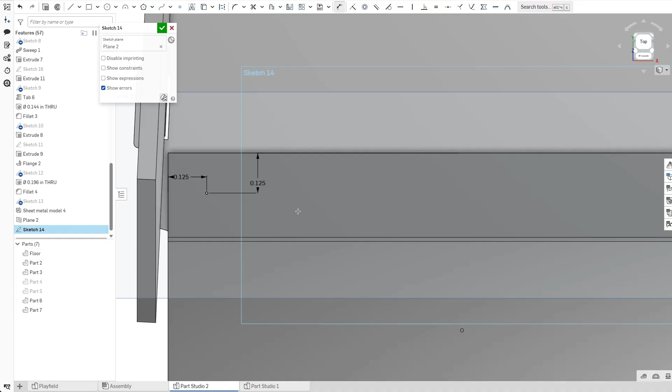And I'm going to start by adding the point where this is where we're going to add a hole for the rivet that will rivet through the ramp. So there we go. And let me add a mirror line here, and we'll mirror that over.

Perfect. Now the other thing is we want to add some access for this part here. Yeah, for that part there. And so what I will do is, let's just make that 1/4 of an inch. You've seen me do this before, so hopefully this is old hat by this point. I'm just going to draw 2 lines that I then make tangent to that circle.

All right, perfect. And then we're going to use the trim tool, trim, trim, trim, trim. Didn't want to do that last one. And then, of course, mirror it over and enclose the one on the right. Okay, so now we can add the hole for our rivet. That is way too big. That should be 1/8 of an inch, since that's how large the hollow rivets are.

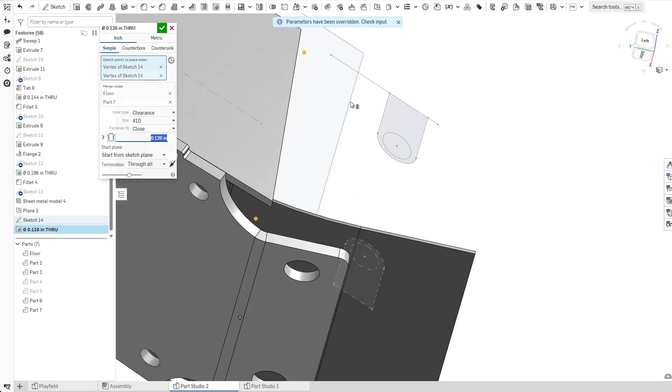Now, one thing you can see here, the CAD program automatically selected cutting through the ramp, but if it didn't, so you can see here floor and part 7. Let's say that it was only cutting through the flap here, and it wasn't cutting through. What you can do is you can click on merge scope and then just also choose the ramp as well. So then you get that in the same spot.

And then let's turn that sketch back on and let's perform a remove operation. And the merge scope here will be the flap. So now we have a custom flap to rivet and make a transition into our ramp. We maybe want to add some fillets on this, so let me go ahead and add some in, because that was looking a little sharp. So we'll put one there, and we'll put one there. Great. Would it look better if it was slightly bigger?

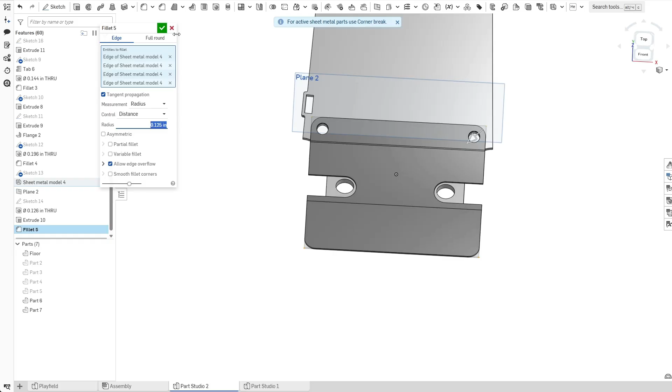Yeah, sure. Now, the other thing that I'm noticing here too is this part here may be cut in a little bit too much. So we could go back and we can adjust that. And that was up here. I know I keep tweaking around with this one. The challenge here, of course, is that you want to leave yourself enough room to put other features like posts or nubs of death without making it too small. Let's see what this looks like. All right, yeah, that doesn't look too bad.

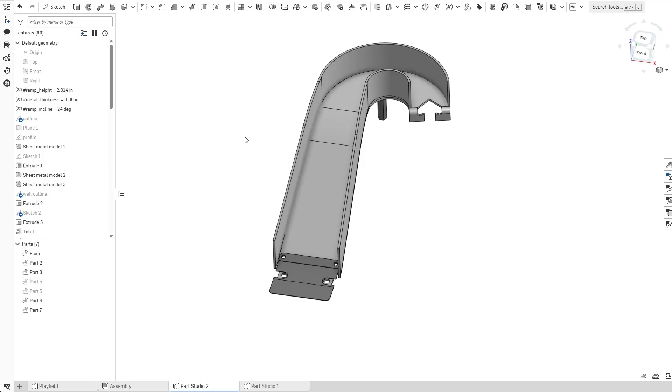I could probably further improve that by making this a little bit closer, and that will shorten that up even more. Okay, yeah, I think that looks good. All right, so there we go. Let me turn off that origin. Yeah, so there's our demo ramp, which I don't know, it looks pretty legit, doesn't it? Let's go ahead and take a look at uploading this into SendCutSend.

So because our ramp is a sheet metal model, there's a couple of things that we could do. One is that we can bring this out and we can export the flattened version of it. So let me go ahead and do that. So I'm going to say export to DXF millimeters. All right, it looks great. And now over here in SendCutSend, I can choose that file and upload it.

Now, there's a few problems that you may encounter with SendCutSend, and I run into this quite a lot. The first one is this, which is you can see here, it says that the DXF file that we have uploaded, the geometry doesn't completely touch. So you can see in their illustration, it's not completely enclosed. And this is super annoying, and this is just an artifact of OnShape. Sorry, but there is a workaround. So let's go back here, and I'm going to delete that DXF file.

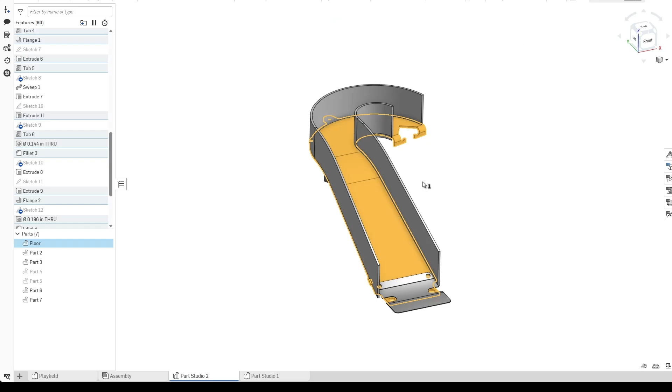Instead of exporting this version over here, we can actually export the entire part as a STEP file. So here you can see STEP right here. We can export that, and then, whoops, I did not mean to close that. So let's export that. And it doesn't happen instantly. It'll take it a second. And then what'll happen is you'll see a download thing appear over here. Anyways, let's go ahead and upload that.

So I'm going to upload the STEP file. They're a little bit larger. They are a 3-dimensional file. And this is a lot more compatible with SendCutSend, as you can see here. So nice. Yes, that is the part that we want. You can see there's 2 options. We could machine this out of a huge block of billet aluminum, which would be incredibly expensive. So I'm not going to choose that option, or we can laser cut it out of sheet metal.

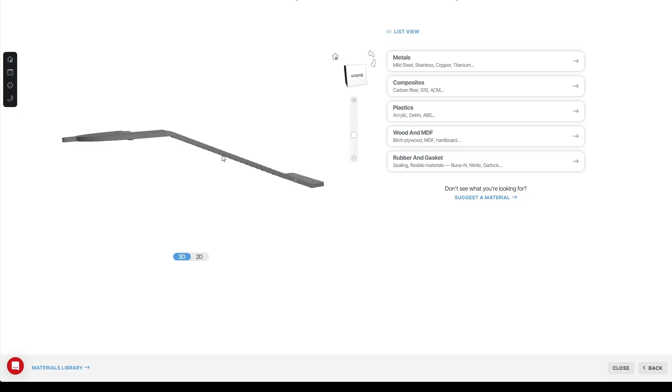Now you notice that when I did that, it just did something that was kind of important. So actually, let me go back. So here we're looking at the model that we uploaded, and you can see here that there's this smooth arc right here. However, as soon as I go into sheet metal, you can see that it re-renders it, and whoops, what's it doing? It's stuck on my cursor. You can see that what happens is it re-renders it, and it replaces that smooth arc with a bend.

So we definitely don't want this because we want this portion to be a smooth bend. We're going to have to do that ourselves, so we'll turn that off. So let's go ahead and choose our metal. So we'll say stainless steel 304.6. Great. And now here we get to the bends, and we see there's a few things going on here.

So we've got some issues with minimum flange, which we can go back and address. And then this is the thing I was talking about. So we definitely don't want this. So if you don't want a bend, you can just clear it out by doing 0. We'll do that bend on our own. Let's address these other issues.

So these down here, I believe I commented on these already, which is in order to bend, the machine has to have enough of the material to grab in order to hold it while the bend happens, and this portion here is too small. So in fact, if we click on it, it'll tell us, you can see here, it has to be at least that big. So let's fix this, and then we'll fix the other one.

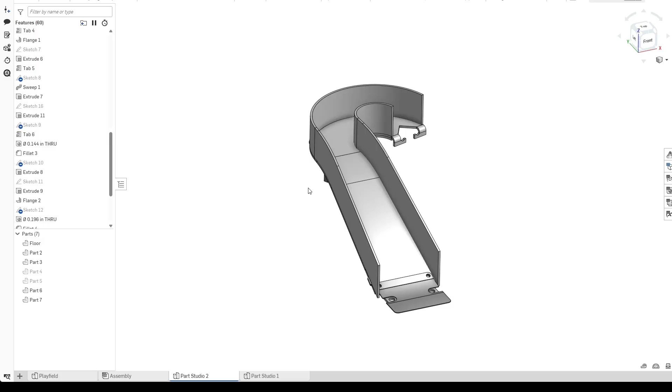So that's over here. So we're talking about that part right there. And I think, yeah, okay, cool. So that's where we're at. And it said the minimum was 0.255. So I'll make it 0.256 just to be on the safe side. Okay, great. It added a little bit of depth there, but it's not too bad.

And actually, you know what? Looking at it, I think this would probably look nicer if we added some fillets. And we'll give it a 1/16 of an inch radius. Yeah, that looks better. All right, well, I had to cut and problem solve there for a little bit. I moved a whole bunch of stuff around, and this is a thing that can happen with SendCutSend where it will be really particular about some of your bends.

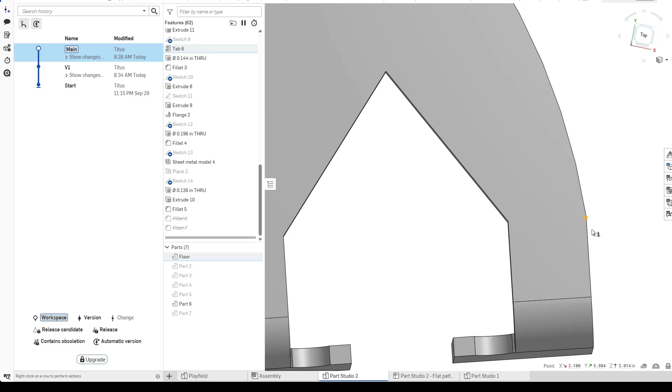So over here, what ended up happening is originally we had the bend coming out here, and I ended up having to add this distance here, which you can see is their minimum distance. What I think it was doing is here we've got this arc that goes around the backside, and it was counting this as not being the full width of the flange. And so because this kind of cuts over into it, it was saying that it didn't have enough space to hold it. So the solution is I just added a little extra length there, which you can see is their minimum distance, to give it enough space to hold it.

And down here, same thing. I ended up just moving around some of the rivet holes and the mounting positions until it was happy. Sometimes what it does is it will take distances like the edge of the circle to the edge of the flange, and you can see that's a much shorter distance than it allows. Sometimes it'll take that and think that that's how big the flange is. It can't decide the difference between the flange and a hole that you've cut in the flange, and if you just move things around, sometimes it'll cause it to read it correctly.

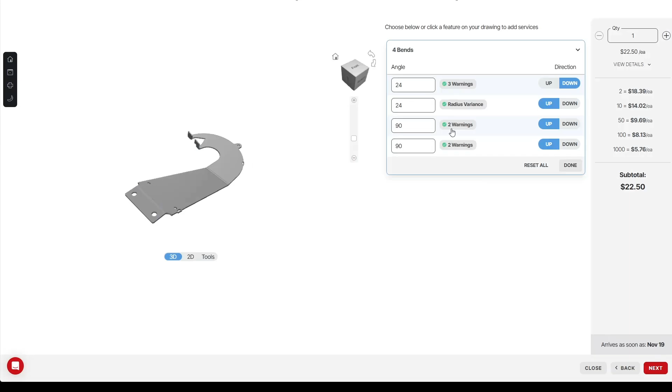So anyways, now that I've got this updated, we can jump over here to SendCutSend, sheet metal, metals, stainless, 304.6. You can see now all 4 bends are doing just fine. They're telling us that we're going to have a little bit of deformation. Yeah, that's fine. Okay. The one thing that we have to be careful of here, though, is this one. We want to turn that off, so I'm going to set that to 0 because we're going to do that ourselves. And, yep, perfect. And with this, we now have a ramp that's ready for manufacturing.

We can choose any of our finishing options, like if we wanted to get it powder-coated bright yellow. If you're doing a submarine theme, there you go. Anyways, that is it. Hopefully that was useful. I tried to have the complete process of doing an entire ramp from start to finish.